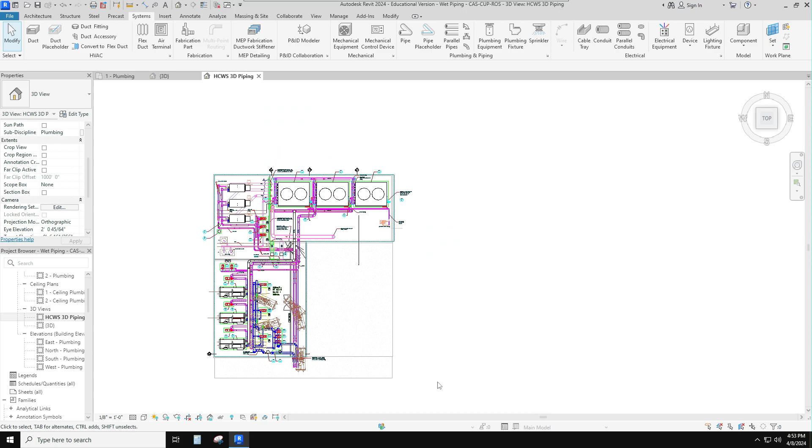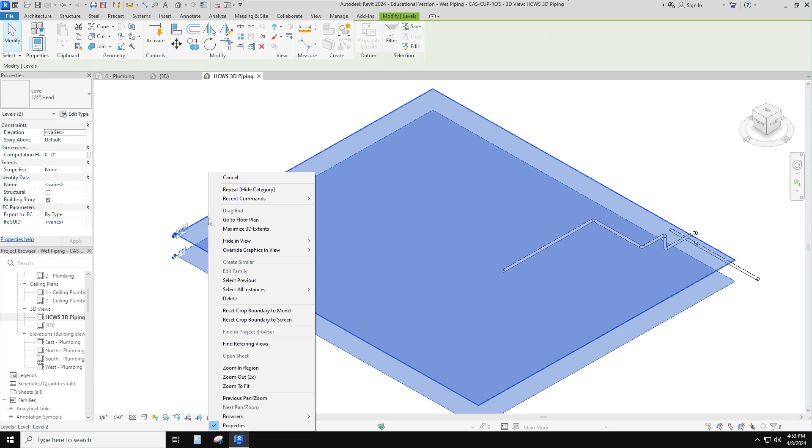Now we know what it is. It's the hydronic cold water supply. And we only want to see some stuff in here. I'm going to hide almost everything so that all I've got is my piping. There we go, I got to hide those things too.

And I'm going to put it in a type of view. I'm going to make sure that we're in fine, and we're in hidden line. Fine and hidden line.

And let's all make sure that we're at the same scale, 1/8 inch equals a foot. So now I'm going to save this file just so that I've got it.

Okay, and I should save this properly. File, save as, project, because this is my wet piping, but it is in this case hydronic cold water supply.

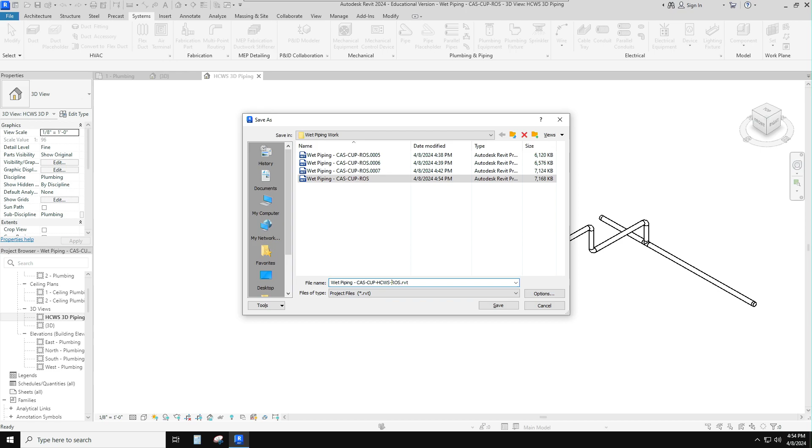Now I need to essentially export this file so it's all by itself. All I want is the piping for NavisWorks. Let's see what the best way to do that. Export, and we can export it in any number of formats. Okay, but I think what will be best for us is if we all put ours into a DWFX.

Where's my DWFX? There it is right there. That way our Revit file is clean and we're working with DWFX.

Now when we go into VR, we're going to work with this view from Revit. But in NavisWorks, we're going to work with this DWFX. And that's just to get rid of all the other views, just get you used to it.

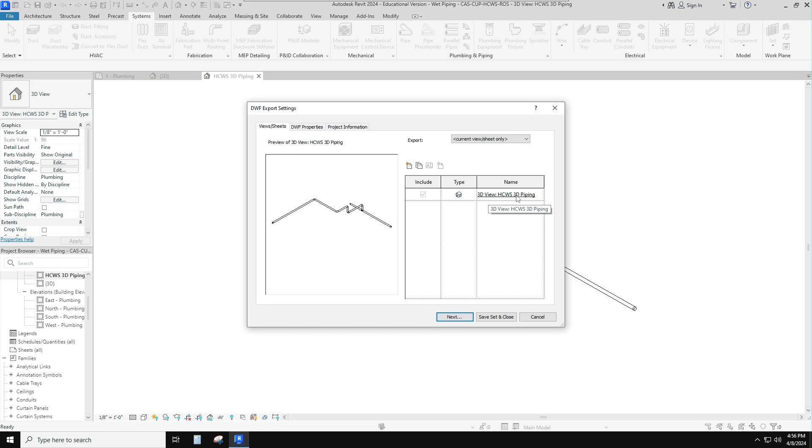So we're going to do this current view, current sheet, 3D view, hydronic cold water supply, 3D piping. That's going to be perfect. And there we go, that's set. DWFX, and now that is ready for NavisWorks. Okay? There we go, that's what we're looking for.